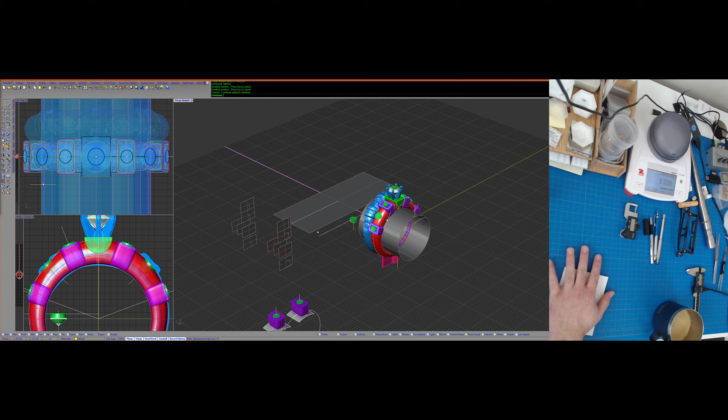All right, and I've got a little webcam set up, so like the desk work, because I'll probably jump over there at some point.

But the first thing I want to do, I need to change this. This was done, but they had a couple of change requests. I need to change this, and I want to show Pascal something. So I'm going to just go ahead, I could edit it, but...

I think it'd be better for him to see it from scratch. So I'm going to grab those children and just delete it. Actually, we'll just go ahead and delete all this. Unlock my spacers. All right, they're unlocked. Delete all that.

Probably easier to turn everything else off and just grab it. Nope, not that one. Okay.

I hope Joseph can come hang out. I got to talk to him the other day.

It's been a long time since we had the old forum up, and I'm going to get it back up and running here soon. Okay, so I've got, make sure nothing's hidden, nothing's locked, and let's go ahead and do that again.

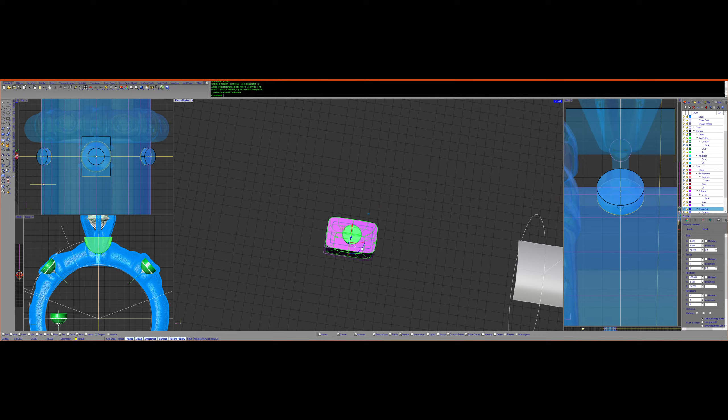Oops. Let's break it and throw it up here so that we can have just a reference. Oh yeah, so I've got to turn this into a square top, but still maintain the same base shape.

So I do want that stone still, so I'm going to copy that and then move that back down. So I want to keep that.

I could grab curves and everything, but I think it'd be better to show Pascal if I did everything from scratch. So the way I would do this is I would start with a polyline, and I want symmetry. So let's see.

These spacers let me know if I'm close to the edge. So right now that should be a 1/4 millimeter, and this should be a 1/2. Okay, so I want a 0.5 millimeter wall at the top because it has, I'm making a matching band for this, and it's big, high polish edges. So let's go ahead and do another.

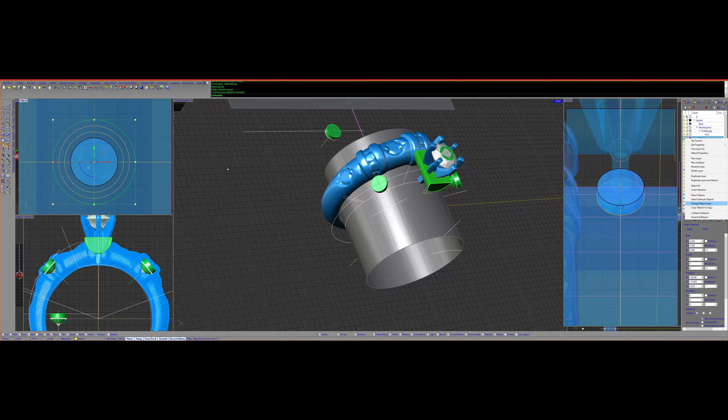Let's get a 3/4 millimeter because I think I'm going to want a 3/4 millimeter top, and I'm going to add it to this group, and then I'm going to throw it on my spacer layer and go ahead and lock that so I don't mess with it anymore.

So we want it to be that big rectangle at the bottom, but then have it squared off at the top. And there's a lot of history in this, and we're going to make it from scratch. So the first thing I need is a polyline.

So I'm just going to trace this. Actually, I'll just grab this one. No. And this one. Just copy that, paste it, and move it down to here. That way I can keep my same base size.

So it's just 2 polylines. And turn on the points for that. And we are going to change this. So now we're going to have this 3/4 millimeter. So I want to set the X on that over to there. That's fine where it is.

Okay, so this is going to be the bottom. Oops, did not grab all of it. This is going to be, grab the curve. Huh. So this is going to be the base of our shape.

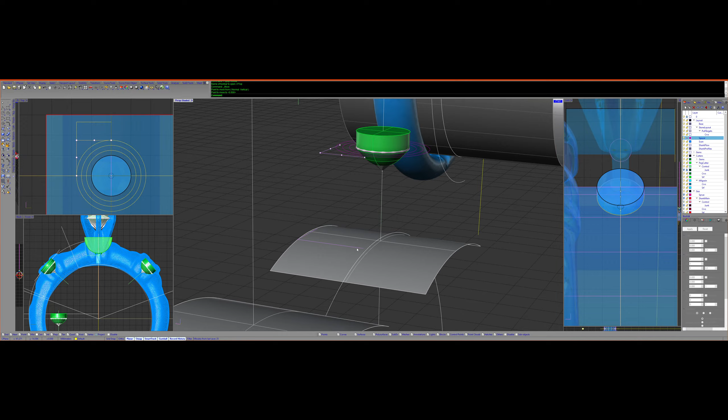And then we're going to do another one where it's more square. So let's copy that, move it back up. And this one, we just need to move down to there. Okay, so we're going to go from that square at the base up to there.

Now this surface is tied to this surface, and the way I get there is this is a group. So every time I scale my finger rail, this curve is flowed to here. And then that's how this surface is made. So I can resize the finger, and it got off of 0 somehow.

So this curve shouldn't be here. Delete that. This curve... and I probably ruined my history. Oh, it is. It's dead on with that.

I don't know where this curve came from. I did this job a while ago, and there were some change requests, so I'm coming back to redo it. I'm going to hide that for the minute. Okay, and hide that.

Okay, rectangular base, square top. Now what I'm going to do is take this and this, and I want this one. Am I going to want one more? Will I want one more? Yes.

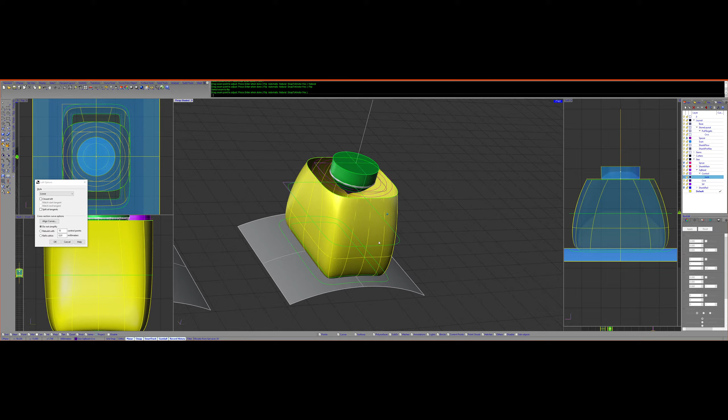So we'll flip this one and change that to loose and see what we're working with. I think that's going to work pretty good.

So we'll go ahead and throw this onto our surface layer. And we'll grab this and say, give me a planar surface. Oh, we'll grab this. This is our edge cutter.

And I just put a little faint line in the model, like a 0.15 millimeter diameter pipe. So that curve needs to go onto cutters, milgrain curve, and the pipe, cutters, milgrain surf.

And then I just need a surface for the bottom, but I'll do that last. I generally don't worry about it until the model's done.

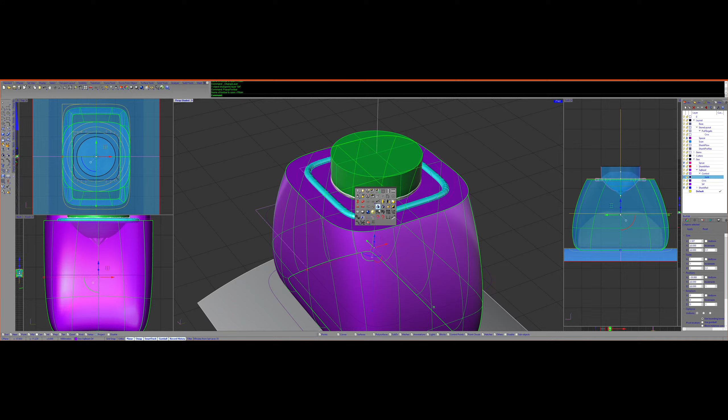Take that back on surf, make that a group, and then take this, this, and this, and we are going to flow. This curve and that curve should be the same length, so I'm not going to tell it to stretch, but I will say rigid and go from there to there. Let's turn on our shank and see how it sits.

We want it to sit on it like a saddle. Like this one is kind of riding like a saddle. So we need some more meat through here, which is easy to do.

We come and find those control curves. We'll turn off our regular curves. There we should have the control curves, and we bring this up, and it's just going to make this balloon out a little bit. Doesn't look like it's tall enough either.

Well, I don't know that yet, because here's one of the changes we're making to this: it was a rectangular shape with one stone. I don't know if that's coming out far enough either.

Let's grab this and this, and let's boost that out just a little bit. That looks about the same. We don't know where the height is yet, because what we're going to do is change this.

So this is a scan of a Stuller peg head. I'll just bring this up so you can see it. Whoops, let's unlock history. Bring this up. So this is a Stuller peg head that I scanned in.

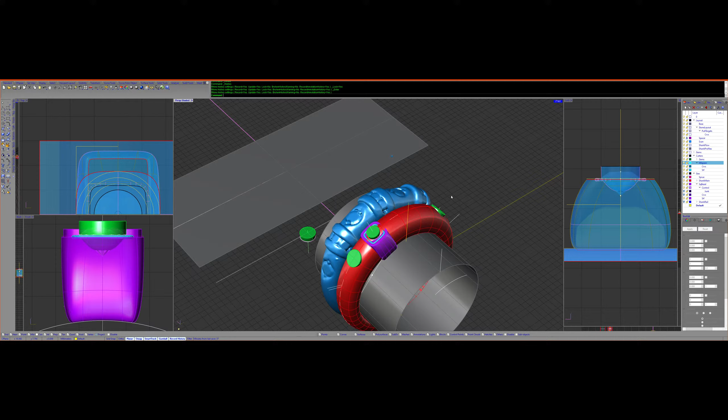Where'd my stone go? Oh, I bet my stone was on one of those layers. I'll just throw it back in. That was a prong set round, and the size on it.

Let me open up my notes here. The center was a 4.7, that is a 4.7 millimeter round. And we'll throw it on zero.

And the other changes: they don't want a peg head, they want a semi bezel on this. So we want, well, we want this to be lower, but we don't want it to sit lower than the scan. We can come down a little bit there.

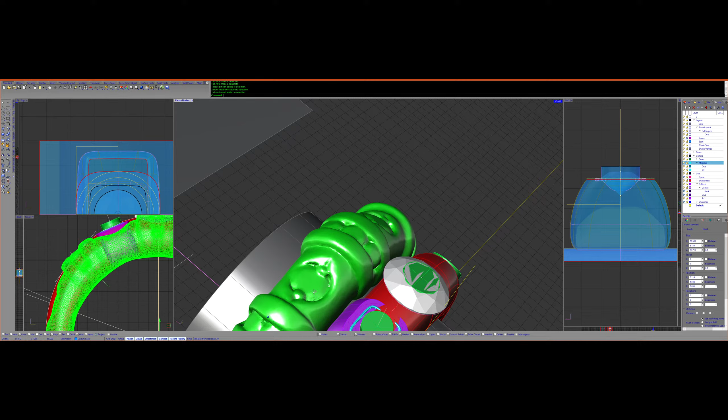And when this stone gets cut out, it'll have the same kind of depression that this one has, because I'm just giving the setter the pilot hole for the stone, and then he's going to make that bright cut, form a little island of metal and turn it into a prong there.

So it'll have that same depression. I'm looking at this top edge here to see how thick it should be. And I think this is in the right spot. I think our shank doesn't need to be as high now. So let's turn all that off. And let's bring this down a hair.

I can adjust the height. Oh, I had multiple things selected. What was the other thing? Oh, that's just a reference dot. Okay.

Let's go ahead and bring it down a little bit more. That's too much. Maybe we can bring this one down a little bit.

This is the one bad thing about having a scanner. I can see that the scan ring is a little bit out of round. So I made the shank the same thickness, but it doesn't look like the same thickness because this starts, it's an oval. So they're just as thick, it's just one is offset a little bit.

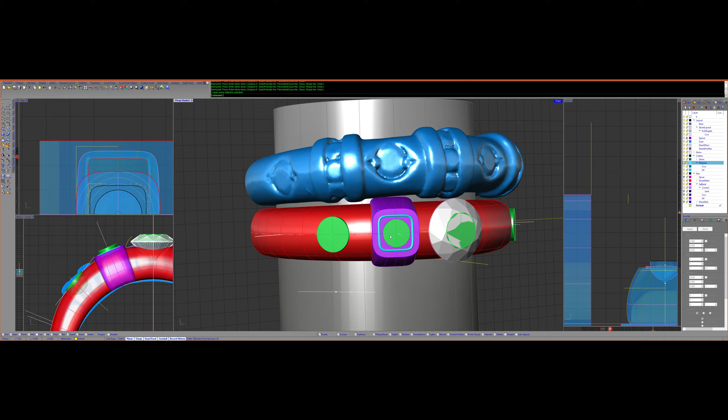I don't have enough space here. That's going to be too thin for a semi-bezel. Which means this isn't going to be centered up with this. Well, I can make this whole thing thinner. Scale 1D. Bring this in.

So I've been talking to Pascal about how long it takes to update things.

And then we'll take this stone. Let's measure this. So that's 1.5. So we want to take 0.3 of a millimeter off this stone.

So I'm going to set my gumball aligned to the block, meaning it's going to be at the girdle. And then I'm going to scale it. Let's see what size it is. I think it's a 2mm. Yes, it's a 2mm, so we're going to take it to a 1.7. That's 1.7 divided by 2. Scale that down, and now we've got a 1.7mm stone.

Our offsets. Looks like something weird happened with our offsets, or I've got an old one on here. So that's 3/4 millimeter. That is the offset line we want to work with.

This should be right there to get it square. And if I want to make this more square, I can take this and scale 2D off of there. And I can tighten up that edge, maybe a little bit more.

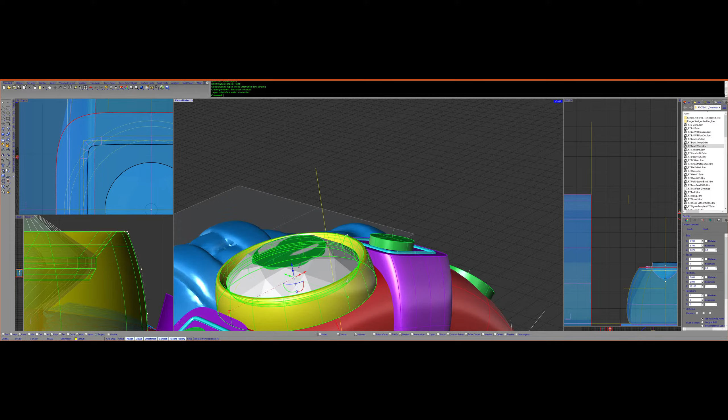Okay, I mean, it's kind of enough space. We just want to stop it right about here. And then blend it in.

Oh, and I deleted that peg head cutter, but that would be a perfect cutter to cut the galley for the stone. I don't know what that is, but I don't need it. It can go away.

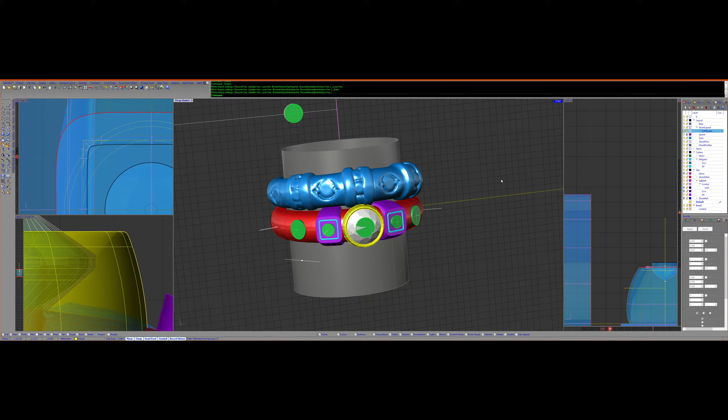More mindless stuff while I'm thinking how to do this. I need another one of these here. I do not need this. I'm just going to delete it before I accidentally use it.

I need another one of those here. So what I'm going to do is I don't care about bringing over my control shapes because I already have the shape that I want. I just want to grab the curves. I don't want the control, I don't want the junk. I want the curves and the surface.

So let's say select sublayer objects. I don't want that, I don't want that. And we will copy it, paste it, turn that off, so we're just getting the curves. And lock, no, move from here to there. Okay.

And I didn't grab this. Do I have the curve for it? Yes, okay. So I want to grab this, copy it, hide that, paste it, and let's move that from there to there. All right, so now I can take this, this, and this, and flow that onto our second spot.

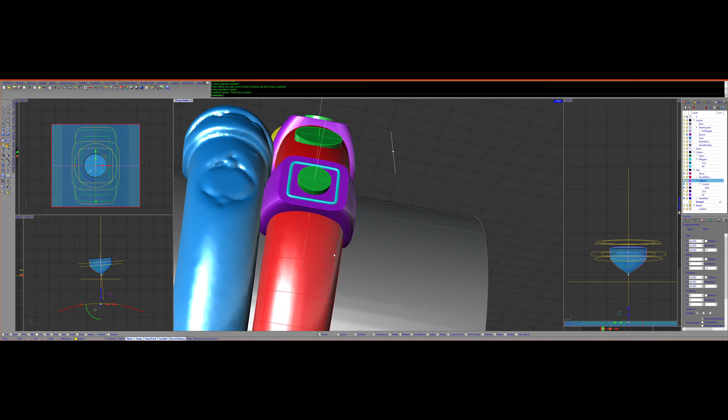I like the way that's sitting. It's a little proud, we can bring it down a hair. Bring it down a hair. Okay, I'm happy with that.

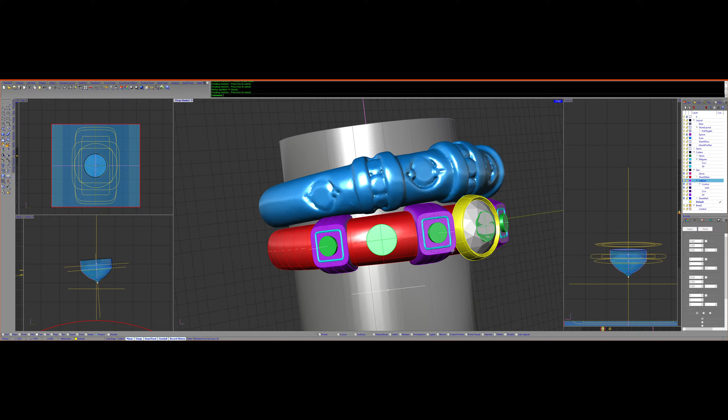Like I said, we're gonna fillet this edge over. We're gonna make it a hard round. Well, not a hard round, like a 0.2 of a millimeter, maybe a quarter millimeter round when we get done. And we'll still have plenty of space in here for pulling prongs. Might make those stones bigger, actually. We'll see how it goes.

This semi-bezel. I don't know, I don't know what to do. This is what kills productivity. It's just a little bit too big to fit in that hole.

Well, let's just see what it looks like if I move this over. So if I take and rotate this down, just a degree. Still kind of looks centered.

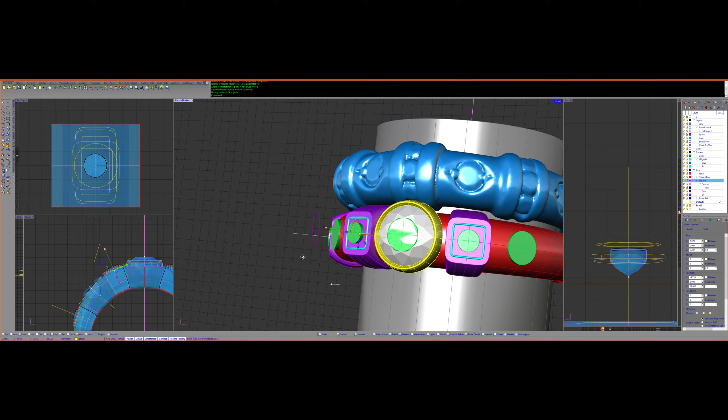It's not centered. Close enough, that gives me enough space. Let's do half a degree. Rotate this way, that's 0.5.

Was that not degrees? Was that millimeters? Undo that rotate. Rotate off of 0, 1 degree. I think my snap was telling me 1 was a millimeter instead of an angle reference. I missed that. Okay.

I think I want to thicken this middle one up. Go back to automatic placement on that. Okay, and on this one, that would be the - oh, I've got the control turned off.

And for this, we need to set it right there. And let's just thicken up the midpoint just a little. Okay, I like that shape better. Otherwise, when I would do that fillet edge, it would fall off too quick, I think.

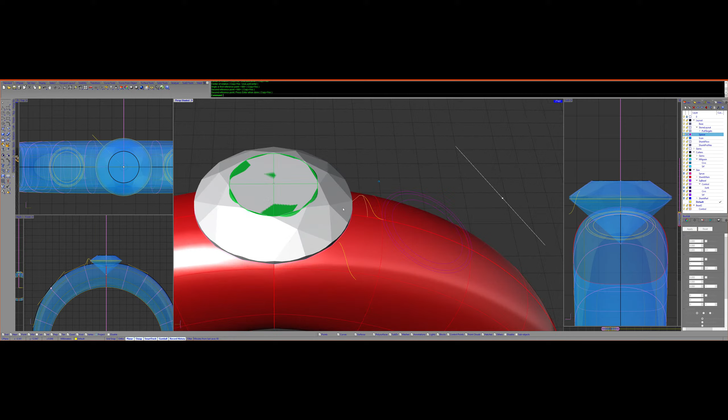Let's see what this looks like. I'm going to do a copy rotate from there to there. And we are way out in space. How do we tie that back into our shank?

You know what, let's deal with the first part. And the reason this bezel wall is the way it is,

Blaine Lewis, New Approach School for Jewelers, he has you hand cut the bezel wall like this when you set the stone. And this is going to be just a hair undersized. So my setter's going to open up this wall where this stone just - I mean, he's going to have to push it in with a brass rod, so it'll be fairly snug just by getting it into the setting.

And then what you do is you take and you put a hammer here, and you hammer on it, and that makes this wall move over just a hair. I mean, this angle goes up to maybe there, and now you have a nice clean surface to polish. Most of the stone is not hidden, not buried under metal. So that's where this shape comes from, and you can buy those DVDs.

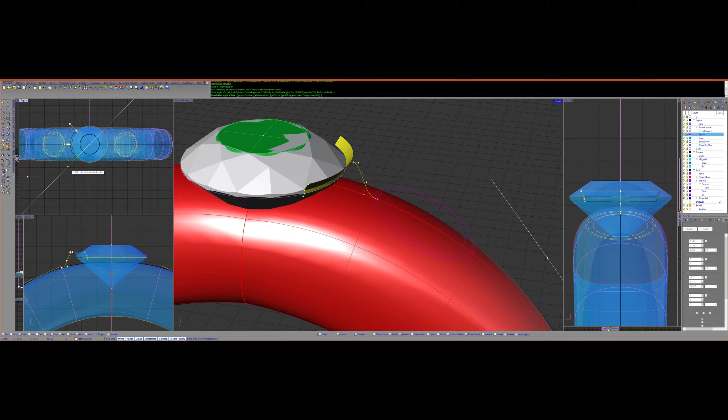I started over here, so I used the C plane instead of the world. And then we want to go to there. Okay, so that has to be there, no two ways about it. Now we just need to figure out how to blend it into the shank.

So let's see where this guy is. Let's cut our window and put in a rail. So to cut our window, let's isolate this. And I'm just going to do another join copy, a bit of fun, to there. Mirror that to the other side. Join copy.

Take the new thing. Do curve through polyline. Take that. I need to put a layer to organize all this on. So the layer name is semi seat cutter.

Okay, and now ungroup that. This can go onto junk, semi seat cutter junk. That is our control, and that is our cutting curve.

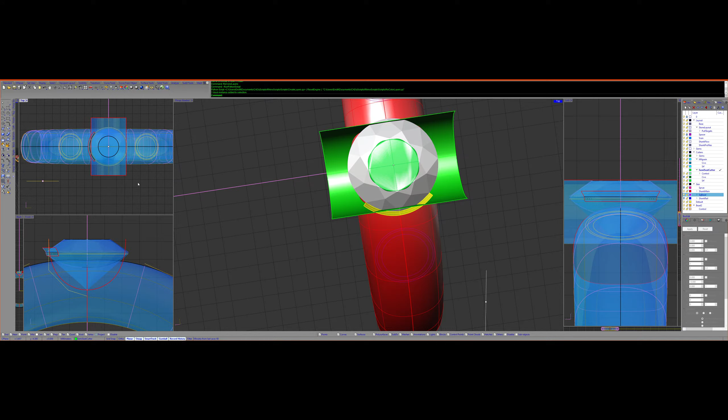I mean, we could. It should overhang this. Yeah, there's no way that girdle is going to rub up against the ring next door. So it could overhang a little bit, but I don't like doing that, because every time this edge gets bumped, it gets flicked up, and it's going to be cutting its way out of this bezel. So I do not want the edge of the stone to be able to be manipulated.

So let's do two things. Let's thicken the band at the top here. And it looks like it is overhanging by at least 2/10. So 0.2.

And now we are not overhanging. Oh, we're dead on. Let's go ahead and bump it another 2/10.

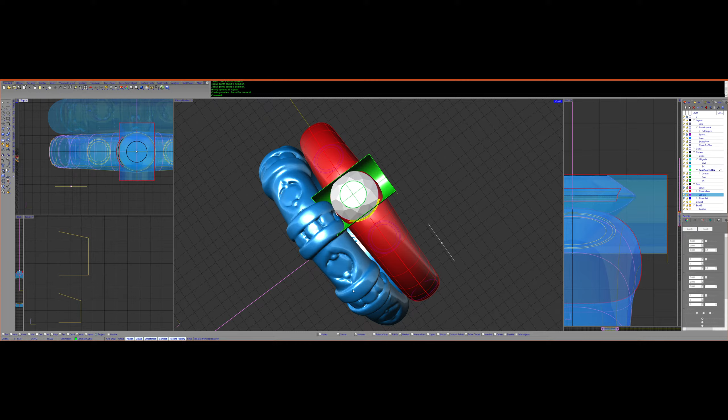And this is where something got messed up. So this is no longer following that.

Let's turn those points on. Let's lock that. And so basically this means this is done. It's blown. Something happened, it's no longer tied into everything. So we're going to delete it and just work on those two directly.

All right, so let's have this match. Turn those points on, lock that. Turn these points on. And we are setting the X and the Z on it. I hate it when I blow history because I have to do stupid stuff like this. Okay, so now those match, and now I will be G1 continuous through there.

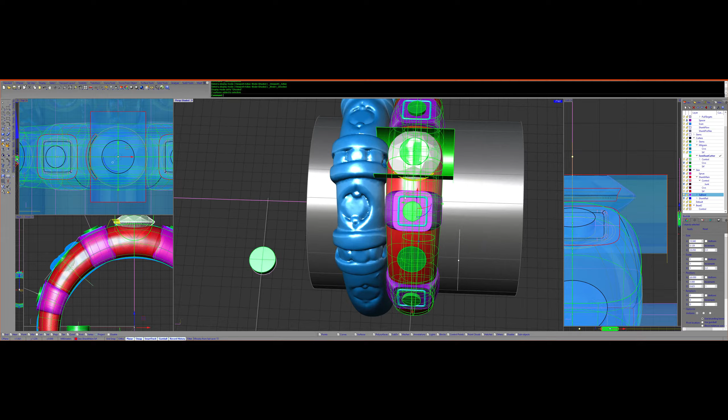All right, that looks like the right height. Let's check our width on this. Now we have some meat overhanging this thing. We gotta make this thing bigger.

Oh man, this messes everything up. I thought this was going to be a simple change, and now it's going to take me... I've got so many other jobs to do too.

I don't want to go any narrower than that. That saddle's still the right size. This one is now too skinny.

So we go to our square bezels, turn on our controls, grab that. That is the base, and we're just going to scale that.

Hmm. Maybe I don't have to scale it that much. Maybe if I just brought it up.

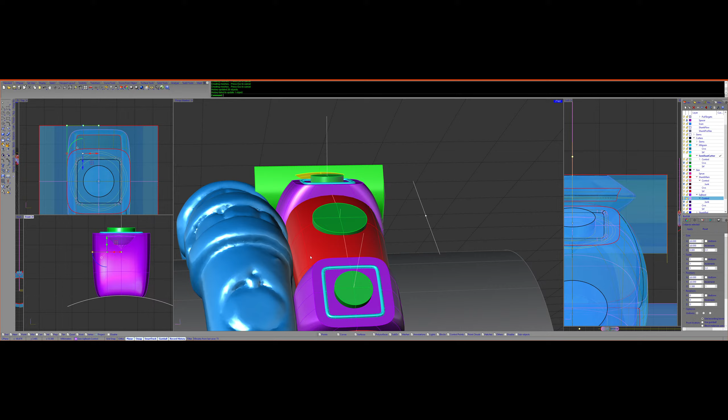That's hanging out a little bit far, but I can fix that later. Okay, I think I like the way that looks, like the same amount of saddle.

Not sure exactly where this is going to mate up anymore, but should be in the same ballpark.

Now our cutter. Are we going to be able to see the culet? So we want to see the culet. And I'm just going to go ahead and add a seat to this thing as well. Isolate.

We'll just put... rebuild this. Let's do 3, 12. And then flatten that, set that to the same height as that.

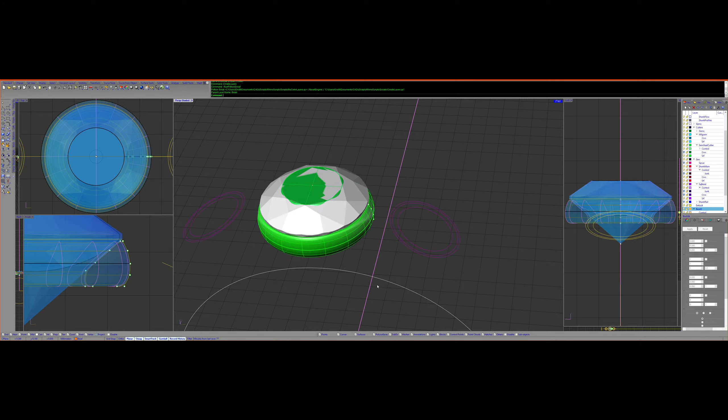Set layer, bezel surf. That's the control.

And this bezel too that the rail came in on, I don't need that anymore. There shouldn't be... there is something on it. It has one hidden object.

Select objects. Unlock everything. Select sublayer objects. Okay, that needs to go onto bezel control. Now get rid of this extra.

Okay, we don't need to see square bezel. We fixed the thickness on that. We don't need to see the shank. We fixed that. So the semi bezel and we're done. Easy. All I have to know is what I want to do with it.

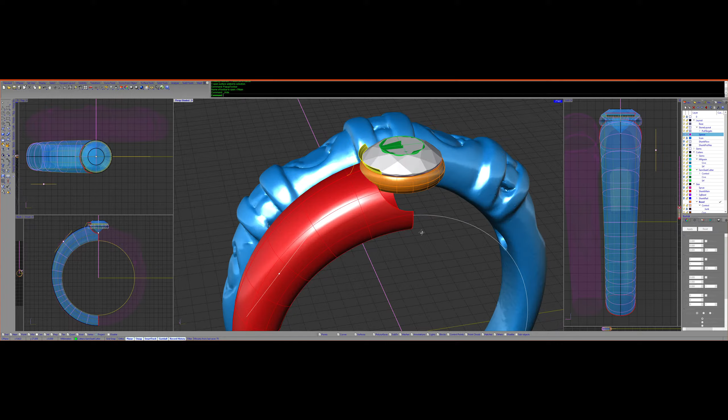Ah, join copy, flip my seam on me. Trim that.

Is that low enough? I might make that even more pronounced because I'm going to have a bridge across the top now. I'm not going to worry about it. I mean, that's over 1 millimeter thick.

So let's do that again. No harm in having a lot of space in here.

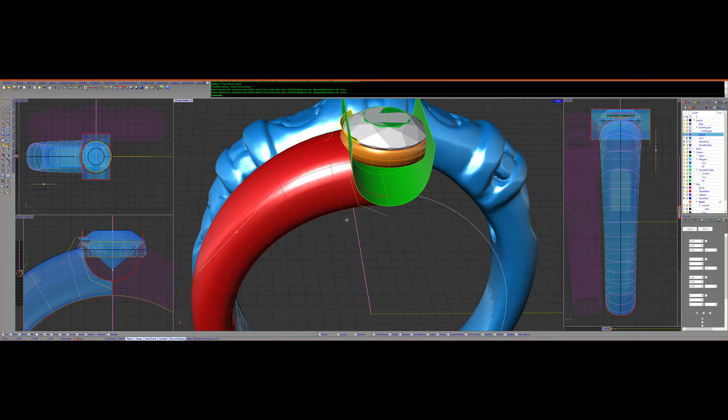Vertex. Oh, the scan is on. Actually, I leave that off. I wonder how it got on. Let's go straight over...

To about there. And let's trim all of this out. Which I guess I could have done to begin with.

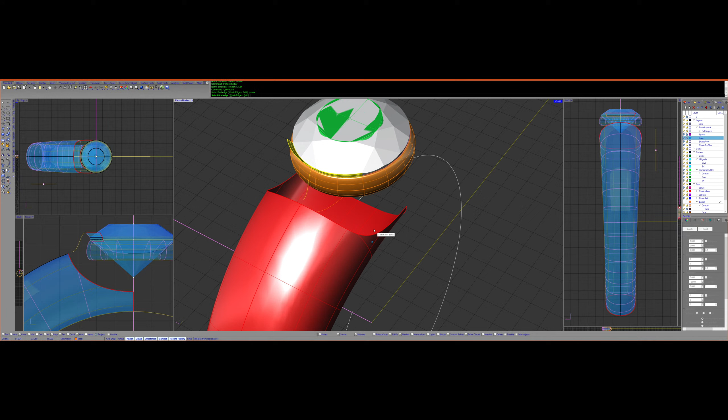Now let's see what a blend surf looks like. I want to blend this side with that, and I know it's going to be horrible to begin with because we want to come off of there. And 2, we're going to position.

Oops, I right clicked. Okay, there we go. And then on 1, we want tangency, and let's... this is not terrible.

I need more metal here though, so that's not going to work. Let's take and offset the top of that to there, and then loft that.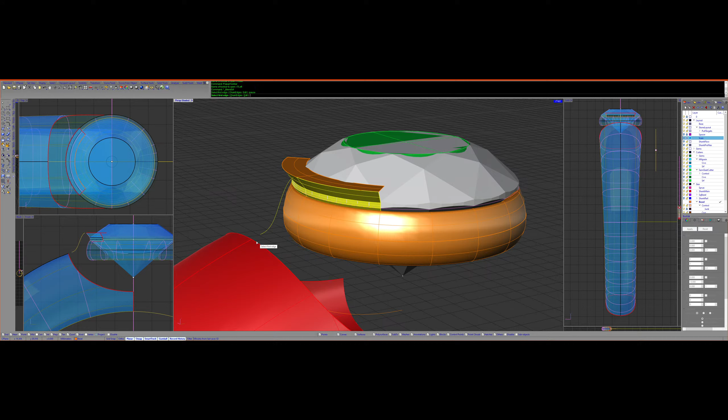And try again. Blend surf there. That surface edge. Snap in the middle. Tangency, tangency. I don't hate it. I don't hate it.

That looks like enough meat. Yeah, that's enough meat, I'm pretty sure. We got a little extra meat there though.

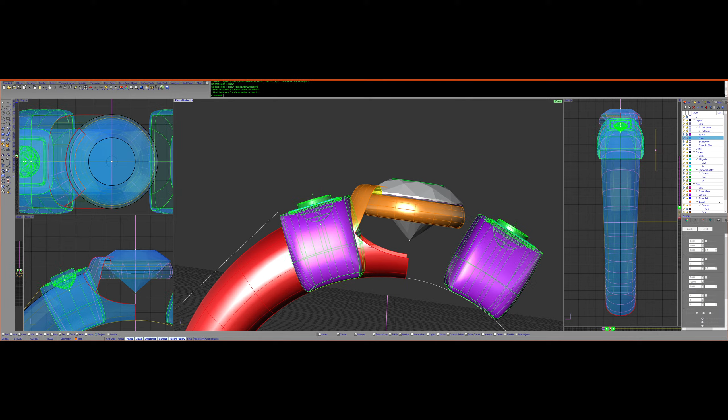I don't hate it. This is casting as two-tone, so that's going to be a plug cut. Once this is hammered down, I think it'll be fine. Once that hammers down and the back of it gets sanded when we put these in, I don't hate it. I think that's going to work.

So those need to go onto our surf layer. We can hide that. We've got to make this watertight now, which is always fun.

Oh, we got a comment. How do I make my zooms cool like that?

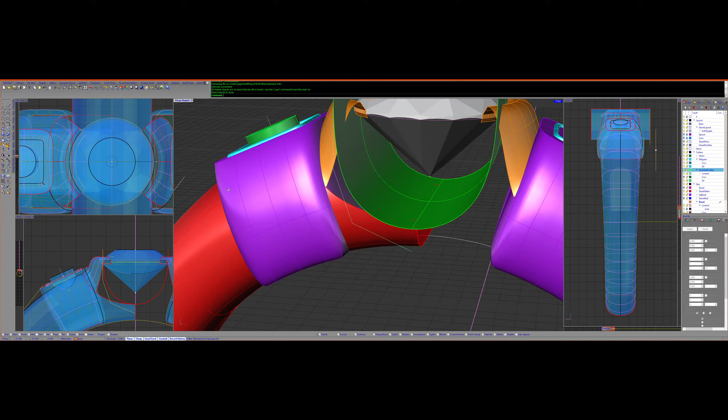My zooms are cool because of something called a 3Dconnexion SpaceMouse. Let me see if I can pull it up here.

Okay, so that is what I'm using right now. I've tried this, but I don't like the ergonomics of it with the buttons on both sides because your hand is right here in the middle. That means your thumb has to do all of this, and then your pinky and ring finger does all of this. I just wasn't a fan of the ergonomics of it. So I just go with this, and there's just two buttons on it. But they keep getting it more and more expensive. This used to be $80, and this used to be like $250. Everything gets more expensive. But that is how I'm doing the cool zooms.

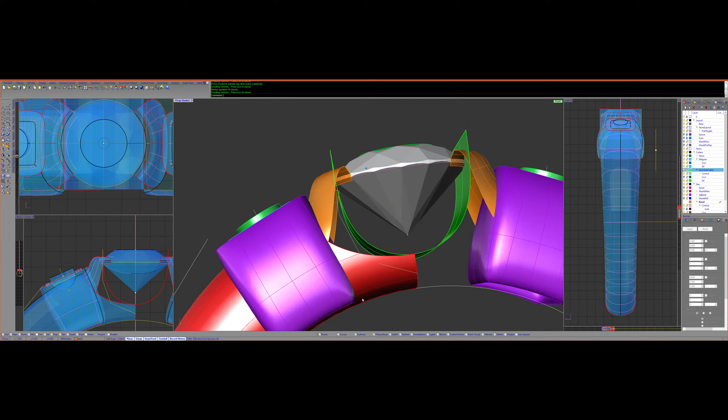So we kind of just want to make this like a straight wall down, but kind of blending into here and here. Man, this is going to be a weird shape to make. I don't know. This is a weird patch. This is terrible. This is not a fun shape to make at all.

Let's do a blend off of here to, let's see, go to here. None of those. All right, start at zero. History purge. Maybe something like that. Well, that's a little too tall.

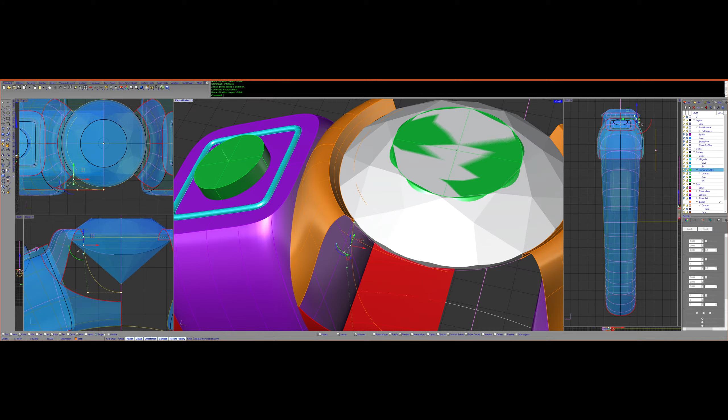Copy, paste, points on, take that. We are not going to project. We're going to move from there to there. And maybe drop that down a little bit, back a little bit. Maybe we bring this in.

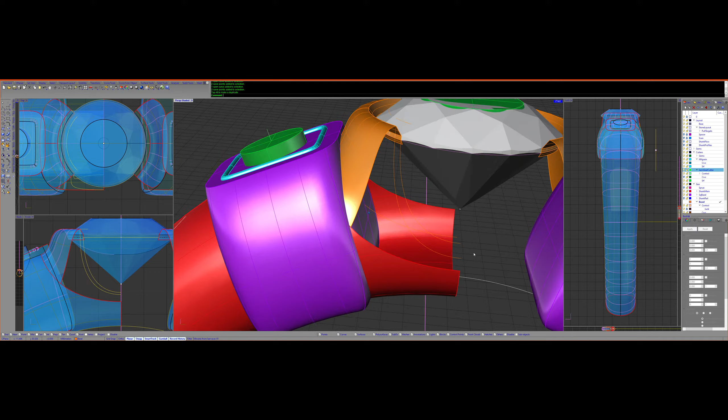Honestly, I don't care how this looks, as long as there's enough metal there where I can shape it like in the casting. I have a feeling I will waste so much time trying to get a shape out of this. I really just want to make it a closed seam with a gob of extra metal, and then I'll take a file and sandpaper and fix it in the casting, because this is a nightmare.

Let's turn our square bezels off. Turn all of our cutters off. We could take and make another version of this to hit it in the center. So I'm going to copy. Well, actually, I can just go to, no, copy, paste, and then set Y on it to zero. Grab these points, move. See, that's coming off the bottom of there, so we want to move it to the bottom of there.

We don't need this bottom lip anymore because we put a rail in. So I can take this, turn the points on for that, and delete that point. Okay, because we don't need the base of it. We have this seat that goes all the way around, right? So we don't have to put a shelf for the pavilion to hit.

And then let's mirror this to the other side. And let's see what a sweep one looks like with this. Sweep one, that rail, this, and this. That's why I don't like sweeps.

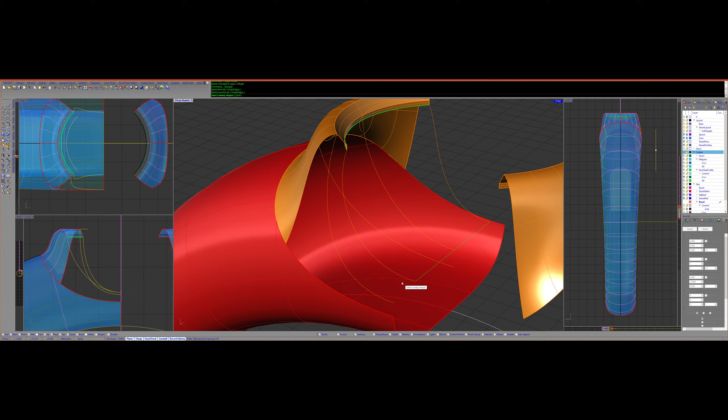Further and further down the list of unwanted tools. Okay, we do not care about tangency. No, we do not, we just want to close this thing up. So... damn it.

I thought this was going to be a quick fix on this job, but this is really turning into being unfun.

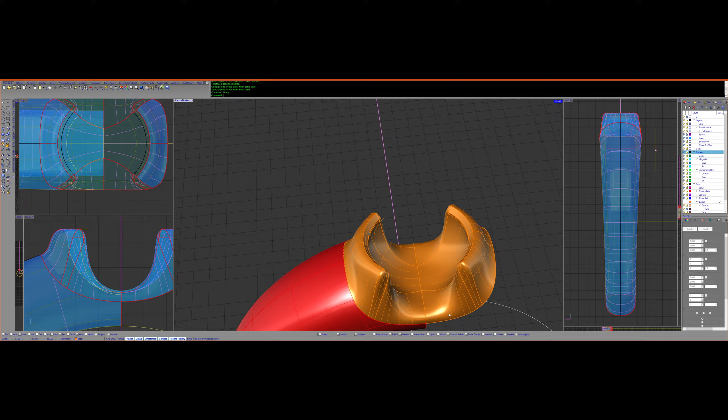Let's look at our seat. It's safe. It's a semi-bezel. This might be tougher to clean up by hand than I thought because we got the seat sitting in here. And this is sticking over, which protects the stone, but with the sharp angle of it, any light that hits it is going to reflect off this way. So it should always be in shadow when somebody's looking at it, which is nice.

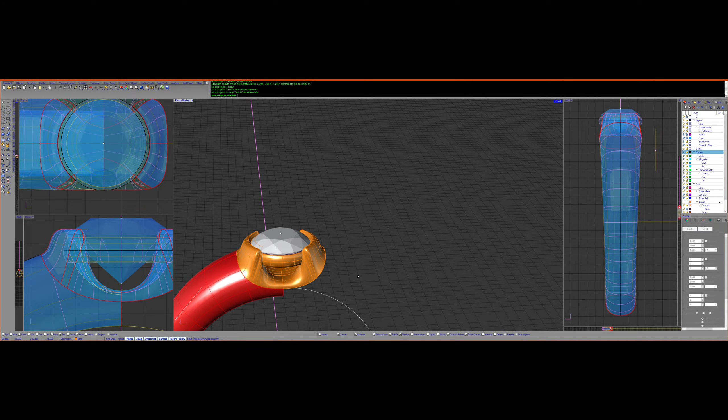I can fix this all. I'm happy with this. This is not pro level, but it will be when I get done with it.

Okay, organization time. Those are all surfaces, go on to surf and hide them. This is surf, go on to surf and hide it. We have that we never used. We've got these curves that all became control curves. Let's just dump that all into curves and be done with it.

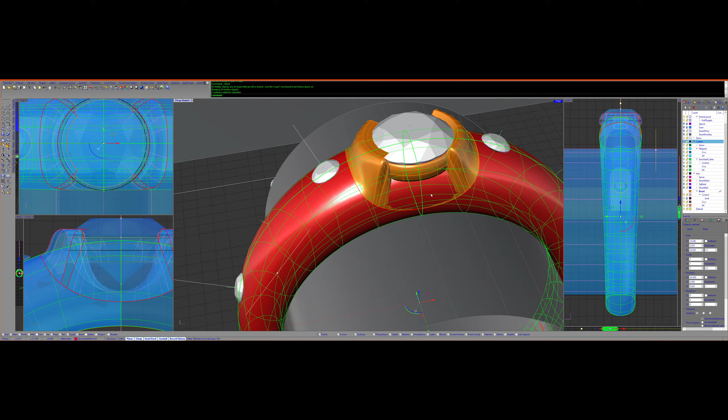So this shank, we can just leave hidden. This we need to mirror over to the other side.

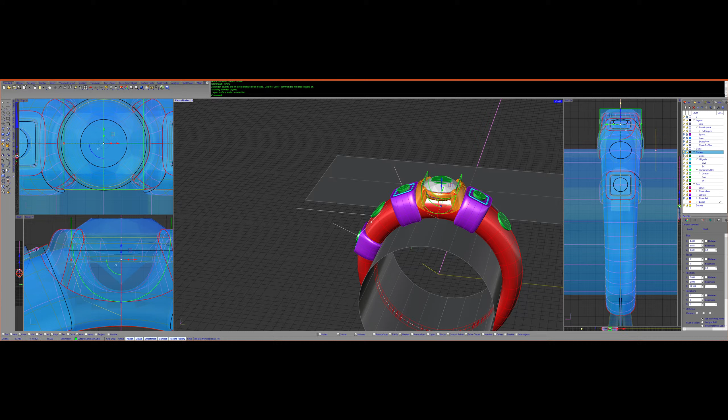Goes on to junk. We ended up not even using that. That can go on to junk, so we just don't keep saving it over and over again for no reason. I want to keep it just in case, you know, I want to keep the one that had history on it.

Is that sitting at the right point? Yes, this is a very thick shank. This never got mirrored over.

And how does that look against the scan? Not quite centered, but I had to do it to fit that in, and I still think it works.

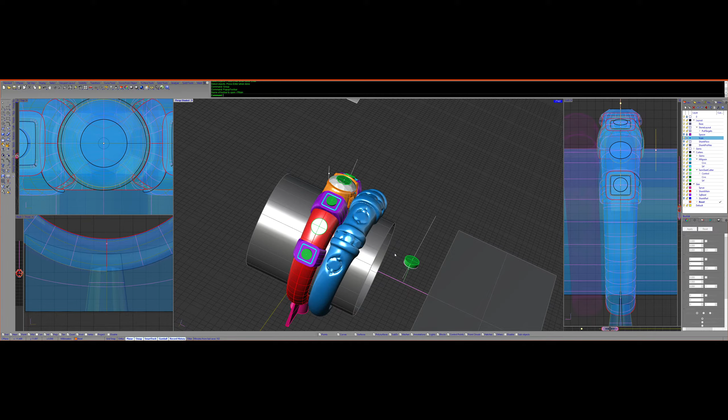Maybe I should bring the bottom ones up a little bit too. Maybe I should take and squinch this just a hair, let's say 2 degrees. Oh, that's the wrong way. Negative 2.

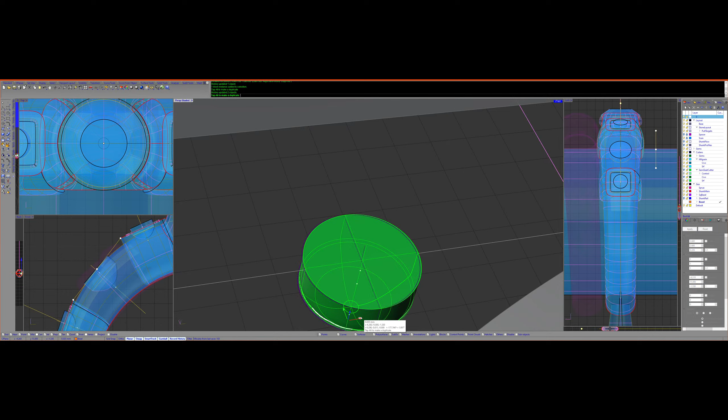And then we need to get this centered between the two. So this guy, unlock. Points on. So that needs to go XZ to there. And that gives us our midpoint between the two. And this stone we just bump until we're on that midpoint. Okay, so now that stone is centered between those 2 bezels.

I like it. I thought it would be a lot easier to get here than it ended up being, but I'm happy with where we ended up.

Is this rail sticking up too far? Yes, it is. I'll deal with that in 3D Coat. Got enough of a lip over there.

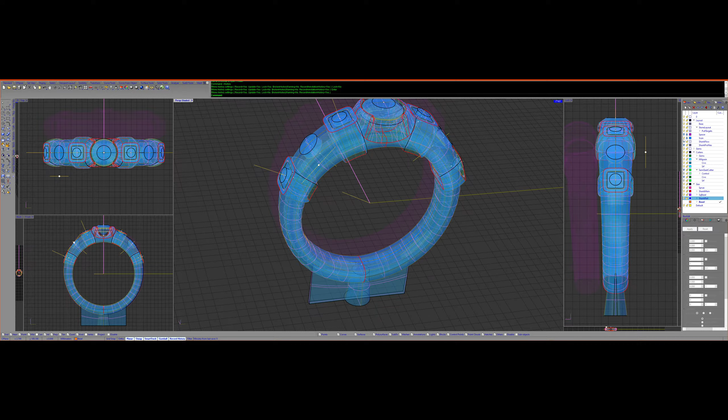Okay, so this is where I save small. And then what we're going to do is just take this guy and isolate it. We are going to not lock things anymore, so I save it before I do the breaking of the history.

So we want to join that together. That seam goes away. And then we want to take this and this and this and this. Join that together. And we missed one.

Oh, did we get a closed surface? Yes, we got a closed surface. This inner rail, join that together. These guys have no bottoms, and I forgot to do it. So we're going to join them and make bottoms for them real quick.

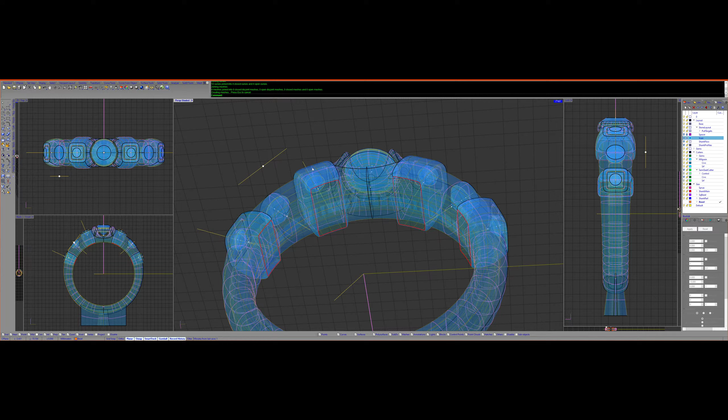So I'm going to say select open surfaces and isolate. We can ungroup this and delete two of them. And then we can say, so we've got an edge there. Crap, I was hoping that seam would be right here in the center. Split edge right there and right there.

And we can do blend surface, chain edges here, here, here, and just go with position. Okay, not pretty, but it works.

Split edge, there, there. Blend surf, chain edges, second edge, position, good. Join, they're closed. Mirror that over to the other side.

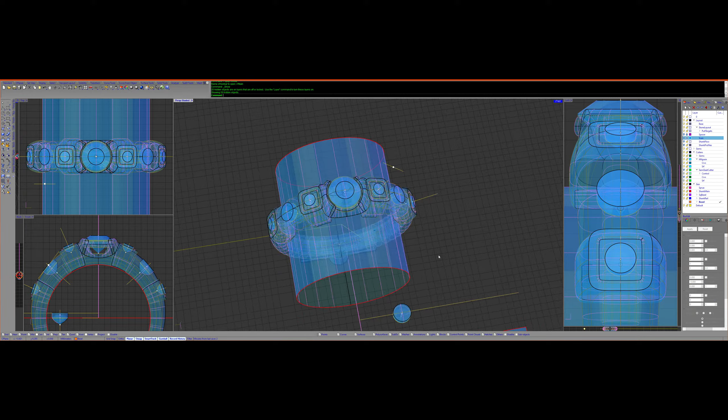Select open surfaces. Nothing's open. We are ready to export. I think I want to take the scan with us to 3D Coat, just so when I snag a picture of all this, I'll have that with it. Export to 3D Coat, and launch 3D Coat.

Voxel sculpting, import temp object, scale 2500. Import as child. Apply. Yes, keep it at the same scale and just switch over to fill. Okay, so I got to get my Wacom tablet out now.

And because I changed all my screen resolutions and everything, I got to launch the Wacom thing and map it. Oh, there's a driver update, not now. Let's go to pen settings and we want to mapping portion, and then there's a way to mark it. Click to define area, so you click once and then you click a second time, tell it okay. And now the pen. Yep. Okay.

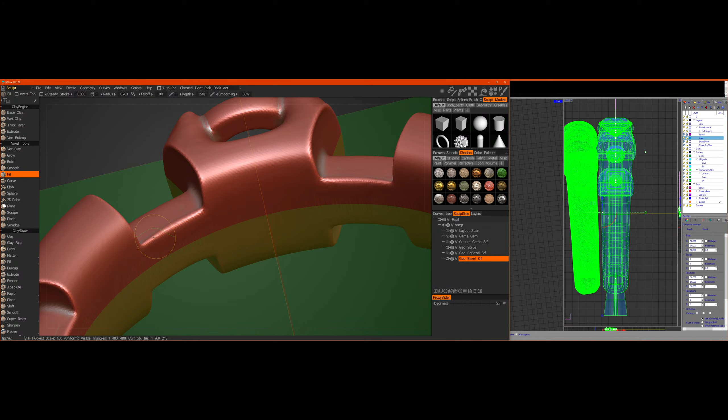This is making me a little worried. This angle should be where this can pop in, but it looks like it hooks a little bit at the end. But it should, that just worries me a little bit, because you need a negative draft angle for this thing to fit on top.

Okay, this is done. So we got our square bezels. Oh, we need our gem cutters. Subtract from the square bezel, and then I like doing this whenever I'm mating two things together. I'm going to take this and clone it. Clone, and then we're going to extrude 0.08, which works when you bring it in and you scale up by.

2500, the 0.08 makes a good little gap, it's enough for the solder to take the space up. It's enough of a gap where once it goes, it'll be a nice surface that's close enough for solder to, what's the word, capillary action, wick into. Subtract from our square bezels. What did I do? Okay, that's the extrude, subtract from square bezels. There we go. So now if we look at our square bezels, you'll see that there's just the hint of a gap. And you need that so they can fit together.

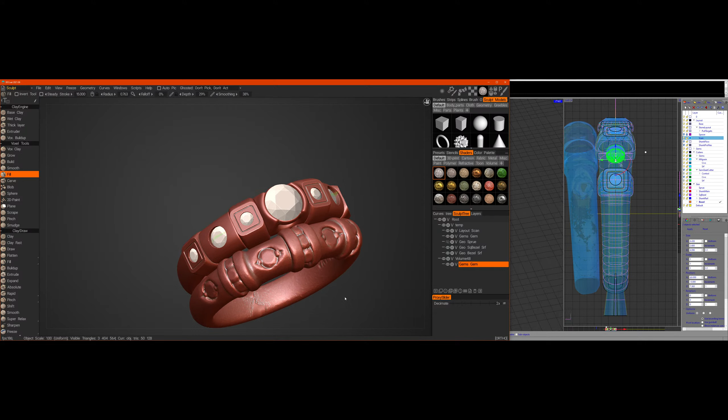Now we're done. Turn my gems on, turn my scan on, and let's go ahead and grab some screenshots so we can share later. Turn symmetry off. Let's make the scan stand out with a different color, there we go. And because it's two-tone, grab it in two-tone.

All right, print screen, top view, print screen, side view, print screen. I think that should do it. That's enough angles to show them what's going on. All right, so we're done with the scan, done with the gems. Turn the sprue on.

Go from voxel mode to surface mode for these guys. And for the sprue, we're going to decimate that 99%. For the square bezels, we'll do 90. There's a wireframe view when you decimate to see if you have enough detail.

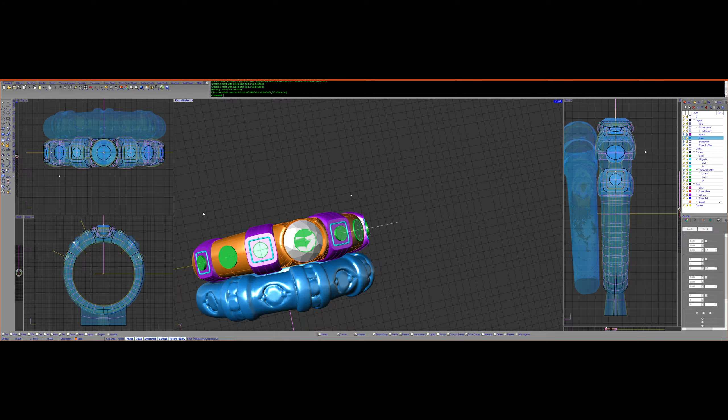I need to turn the screen off while I open up the next model. So I don't save this, right? Like the last time I saved it was before I broke all the history. I always double check that I hit save small over here, because 'do you want to save, no' is not something I'm very comfortable clicking on. So I always double check that there's a save small, real recent. And then I broke all my history.

When I open the file back up, if I have to make an edit, I don't care what's wrong with it, I got to edit it. I want to go back to before I broke all the history. So I check that I made sure I have save small on. So do not save changes, and start us with our template, which actually I need to open an existing file. So I'm going to be rude and hide while I open it.

Okay, and this is another really weird job that I'm doing, where I've got to make array polar 0, number of items 4 over 360. Okay, I got to make this kind of a ring top.

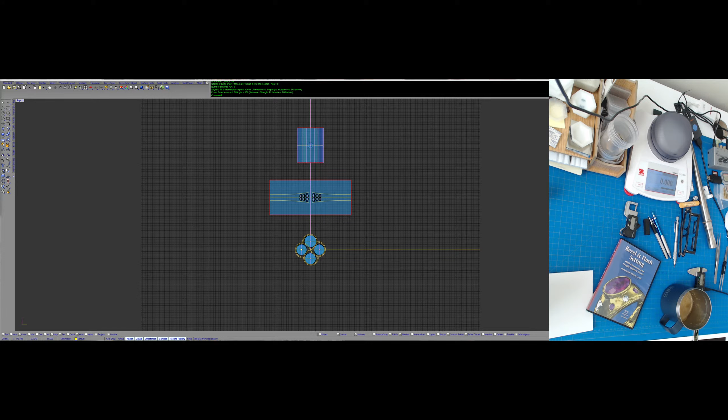I have a webcam, I can show you. Turn on the webcam. This is what we are making.

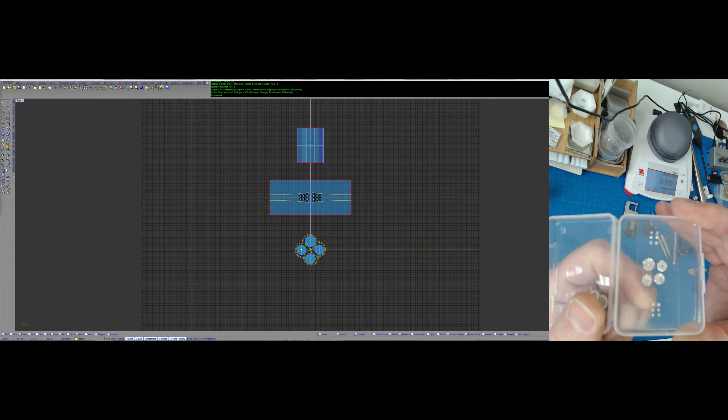So this is the ring that she likes. These are her giant stones, and we're going to try and get all 4 of those in. These are all old miner cuts. If you look close, you can see that the culettes are pretty much open on all of them. And because of how many years they've been around, this round one has now been chipped into an oval. So I'm using the largest part of the diameter for the model.

Yeah, that's what we're doing, we're turning this into this. And I'm not quite sure how to do it yet either. Let's get rid of the tablet here, a little Wacom.

So I played around with this one multiple times now and just quit in frustration, but I think this is what I've decided to do. We're going to undercut the inside edge so there's a little bite out of all of them. Then we're going to make a bezel wall here where all the stones kiss this outside bezel wall. The question I have is how much of this stone do I want to hide, because it's going to be undercut in this wall. It's just a lot of stone to not show, which is weird.

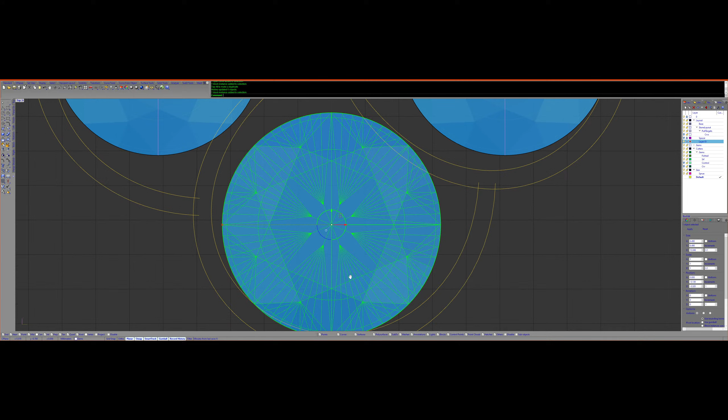Let's bring this in so it matches that curve. It's just such a bigger stone than the others. I hate that it's going to get buried, but 'tis what it is at this point.

All right, so we need to make a surface that can hold all of this. And then we need to take that up 60 - I do 30, 60, nice round numbers. I do want to add a grid snap for working up here though, that way I have something to snap onto the center up here. And then we're going to rebuild this, let's try and rebuild it as a 2-3 and see how that does. Turn the points on, grab the center.

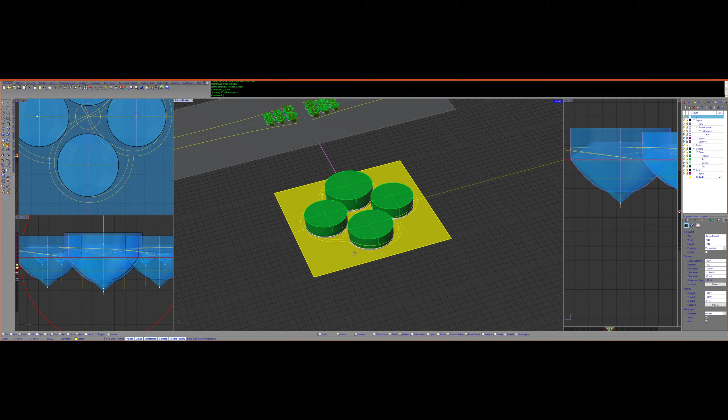I don't need the circle. Let's turn... actually, let's just delete all of that. Select children, delete, and turn that off as well.

Okay, we need another curve just like this one. We'll start mocking up the interior wall. Copy, paste, points on.

So back here in the back, this is where we are going to do our bezel wall. But over here, we've got our girdle poking under.

Something like this. And now let's, did I flow those curves over? I did, I left them. Let's get rid of that.

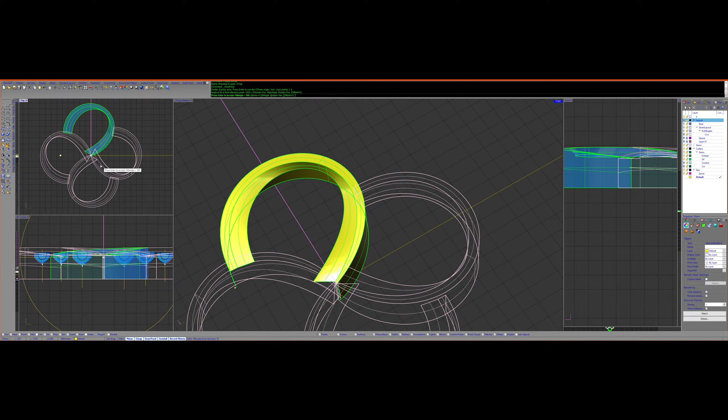Let's get our base layer. Flow from there to there. Let's see how this looks. On our depth, we have...

I didn't reflow my new depths. Delete. Turn the base back on.

Flow rigid. There to there. Okay, so there's my depths now. And how far are we off the bottom?

A 15th of a millimeter. That's not enough. I gotta go up higher. So that's a 15th. I want at least 4/10.

Oh, 0.25. Double check.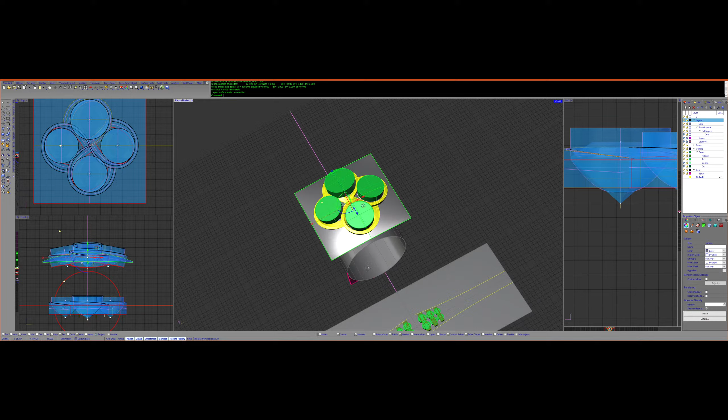0.4. All right. Can we bend this down anymore? Do we want to?

Oh, I need to change out these cutters. Replace block.

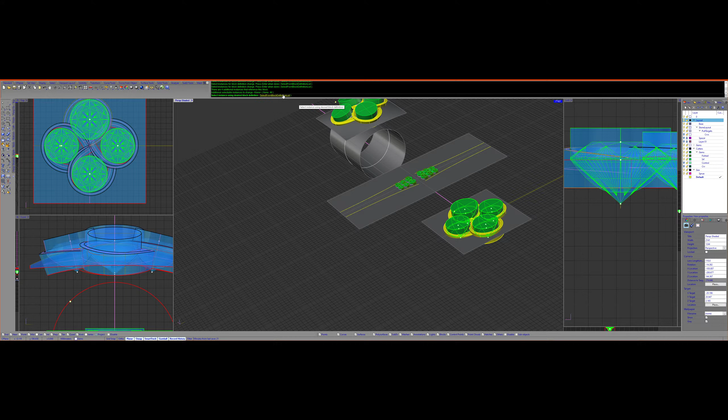This one, this one, this one, and this one. From definition list, and we are going to use the channel set cutter.

So now we'll just use that edge to cut in. Okay, it needs to cut into this wall and have enough space over here.

Why is that one so far off the wall? Um...

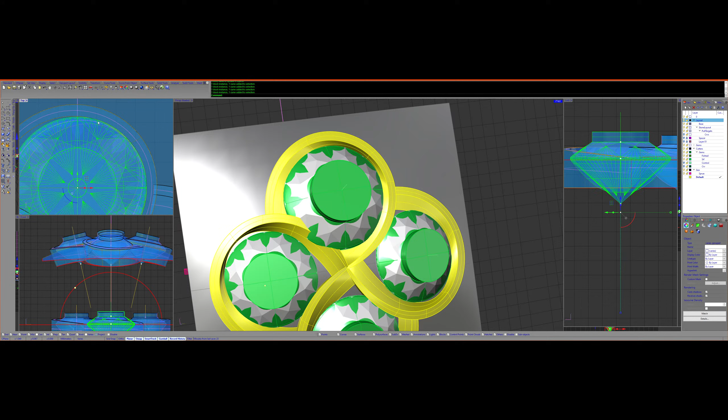It's touching here. It's very odd.

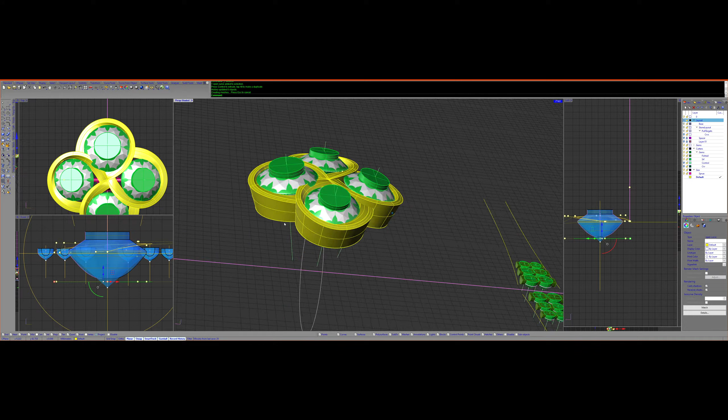So let's get that down to the finger rail and just going blocky, just trying to get a feel for how everything's going to be.

Did that change anything? No. All right. And then...

This inside curve, this needs to come down. Overcorrected there.

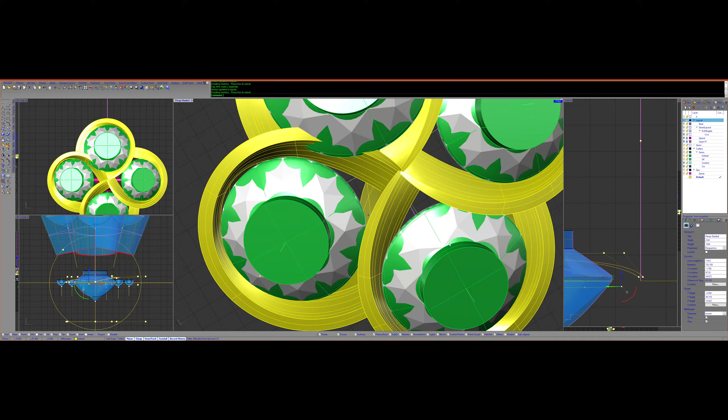How close are we to poking through the other side on this? Okay.

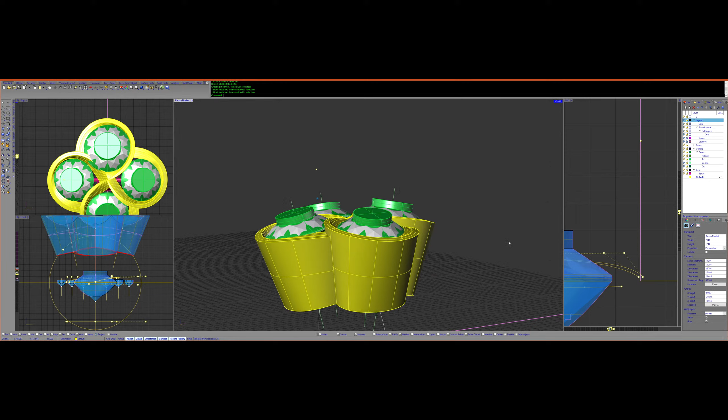Oh, this one's poking right through. That's... it'll look all right flat, but because this is bigger, it flows from the center point on it.

So it's further out on the curve than these guys. So if it's further out on the curve, it's going to have a steeper angle and it's going to miss this edge.

I don't know of a good way to mock this one up. I definitely don't want to edit over there and keep having to come back over here to see how it looks.

But maybe I should just edit in place. I think I'm going to have to edit in place.

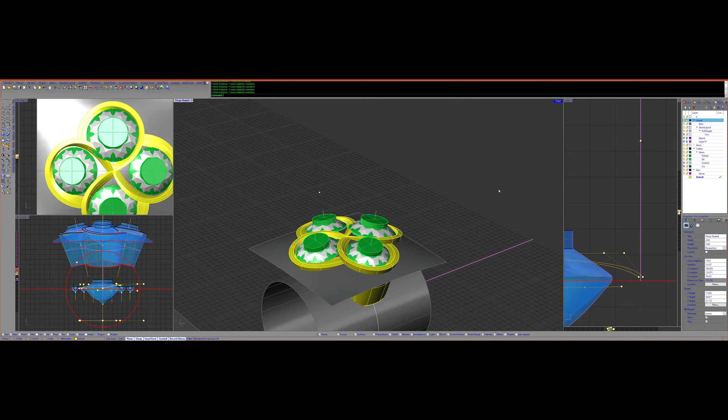You guys understand the problem? I normally work off of a flat plane and put it onto a curve, but the stone is so much bigger that because it's flowing to this part of the curve, it's going to be at a different angle than the rest of these.

So this one tucks under, this one tucks under, this one farther out on this angle, it's not going to tuck under. So I can't exactly work with it on this plane and get it here.

I've got to, I think I'm going to have to do it all in space. I'm going to have to do all the editing over here and just not use a base plane at all.

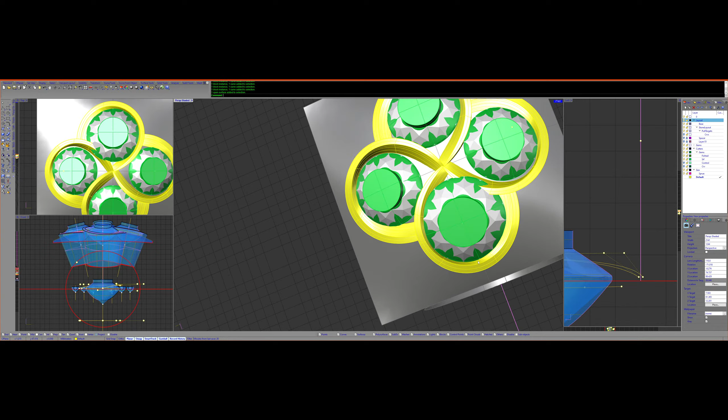But I'm not sure. So I'm going to go for a walk and think about it because I want to at least think through this idea before I go through doing it.